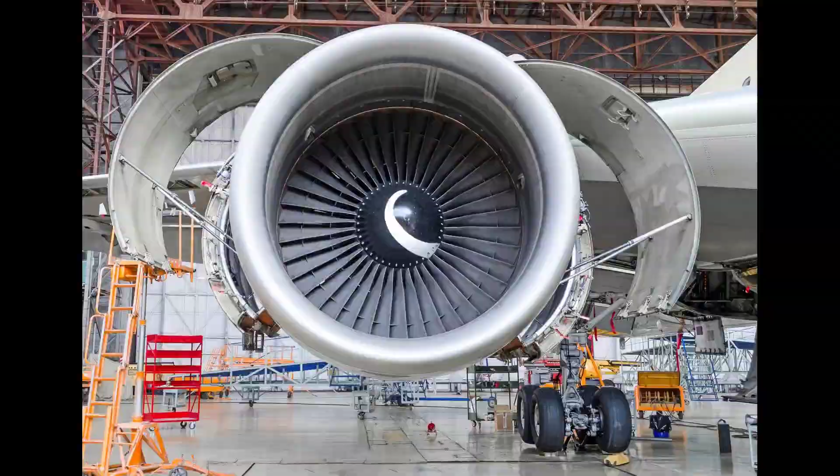Impact Report: anticipated 35% revenue surge in aerospace, telecommunications and environmental monitoring by Q1 2025. Date: February 7, 2025. Executive Summary.

By Q1 2025, the aerospace, telecommunications and environmental monitoring sectors are projected to experience a remarkable 35% revenue surge. This growth is driven by several factors, including technological advancements, an increase in air travel demand, and heightened defense expenditures. This report provides a comprehensive analysis of the competitive landscape and forecasts trends shaping these industries, incorporating insights from various sources.

1. Aerospace sector growth. The aerospace industry is on a robust growth trajectory, with the aerostructures market expected to rise from $60.06 billion in 2024 to $65.07 billion in 2025, representing a compound annual growth rate (CAGR) of 8.3%. Key contributors to this growth include increased aircraft production.

A significant rise in the production of commercial aircraft is anticipated. For instance, Airbus reported a delivery of 735 commercial aircraft in 2023, marking an 11% increase from 2022.

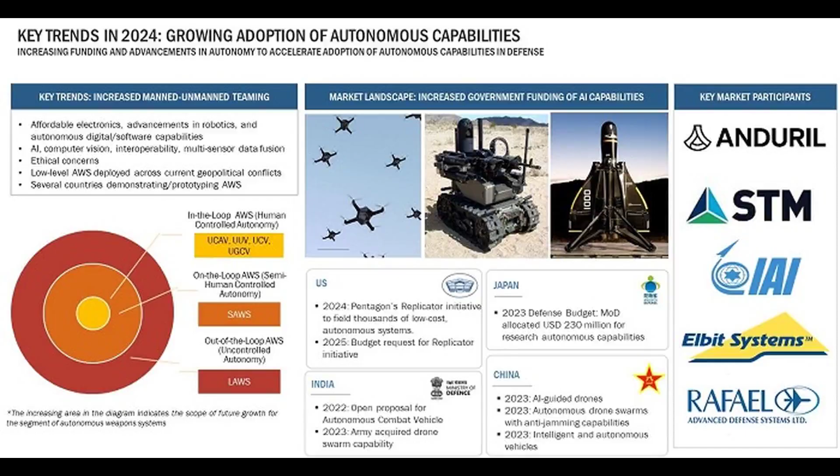2. Telecommunications sector dynamics. The telecommunications sector is poised for growth, primarily driven by the recovery of air travel post-COVID-19. The International Air Transport Association (IATA) predicts an 11.6% increase in air travel demand in 2024, which is likely to catalyze investments in telecommunications infrastructure.

This growth will be characterized by technological advancements. The integration of AI and unmanned systems will enhance operational efficiency across both commercial and defense sectors. Increased connectivity needs: as air travel rises, so does the need for robust telecommunications networks, particularly in remote areas.

3. Environmental monitoring industry expansion. The environmental monitoring industry is gaining traction, driven by a global emphasis on sustainability. This sector is witnessing adoption of eco-friendly technologies. Digital twins and 3D printing are being utilized to minimize waste and optimize resource usage in aerospace operations.

Regulatory pressures: companies are increasingly facing regulations demanding transparency and environmental impact, leading to investments in monitoring technologies.

4. Common themes across sectors. Several overarching themes emerge from the analysis of these three sectors. Technological integration: advanced technologies, especially AI, are crucial for enhancing customer experiences, optimizing supply chains, and improving service delivery.

Defense spending as a catalyst: the ongoing geopolitical tensions are pushing countries to bolster their defense budgets, significantly impacting the aerospace and telecommunications sectors.

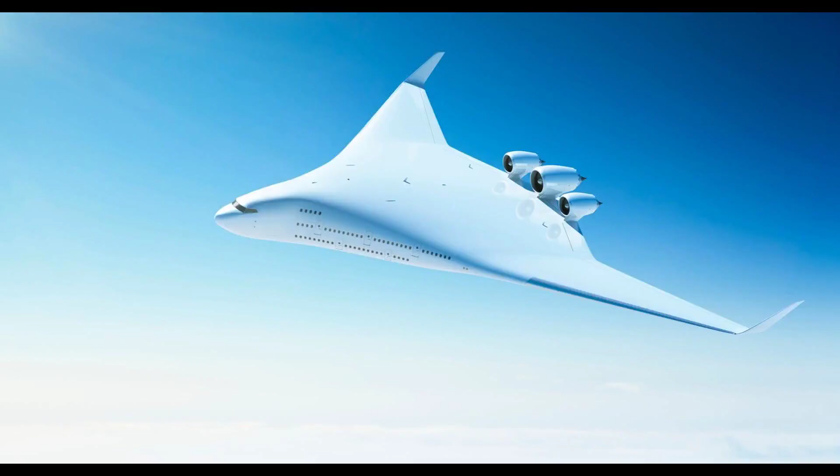Sources: 1. GlobeNewswire - aerostructures market report and competitive analysis 2025 featuring Spirit AeroSystems, Saab, Triumph Group, Leonardo, and Elbit Systems. 2. Deloitte Insights - aerospace and defense industry outlook.

This report encapsulates the anticipated growth trajectories and competitive strategies shaping the aerospace, telecommunications, and environmental monitoring sectors as they approach the end of the first quarter of 2025.

Counterintuitive insights in the anticipated revenue surge in aerospace, telecommunications, and environmental monitoring by Q1 2025: 1. Increased defense spending versus commercial growth.

It may seem intuitive that increased defense spending would lead to a decline in commercial sectors due to budget reallocations, however, the opposite is expected. The projected 35% revenue surge is partly attributed to heightened defense budgets, which not only bolster military contracts but also stimulate demand in the commercial aerospace market. This is reflective of a broader ecosystem where defense innovations often trickle down to commercial applications, thereby driving growth in both sectors.

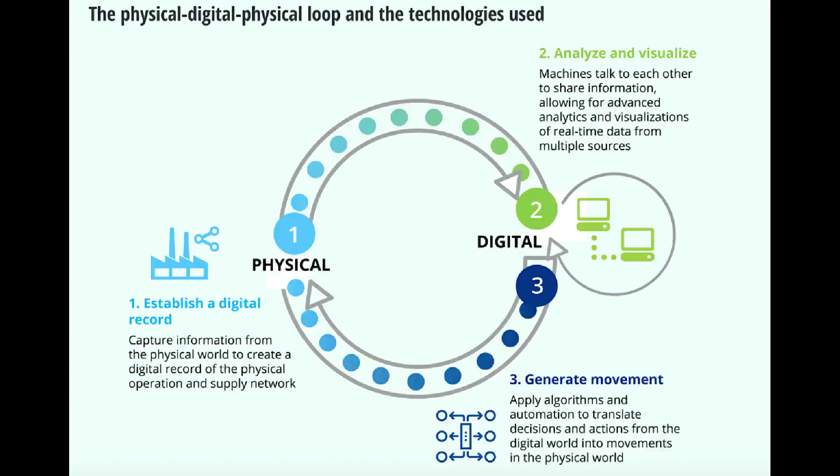6. Advanced air mobility's urban focus. The focus on advanced air mobility (AAM) is often seen as a futuristic endeavor aimed at revolutionizing air travel. However, the current trajectory emphasizes urban applications rather than long-distance travel. This urban-centric approach might seem counterintuitive given the broader context of AAM's technological advancements. The expectation that AAM can become a viable alternative to ground transportation within urban settings highlights a significant shift in market perception and potential revenue streams.

7. Geopolitical tensions as a catalyst for innovation. While geopolitical tensions typically evoke concerns about instability and economic downturns, they are actually acting as a catalyst for innovation within the aerospace and defense sectors. Increased military spending and the urgency to modernize defense capabilities are expected to drive technological advancements and partnerships that may otherwise not have been prioritized. This suggests a counterintuitive relationship where conflict can spur growth and innovation rather than solely being a disruptor.

8. Digital twins and resource optimization. The adoption of technologies like digital twins in manufacturing processes is often associated with high-tech industries, yet their integration into traditional sectors like aerospace reflects a counterintuitive shift in resource management. Companies are leveraging these technologies to optimize existing processes, reduce waste, and enhance operational efficiency. The expectation that such advanced technologies will be foundational in traditional manufacturing challenges the perception that innovation is limited to new product development.

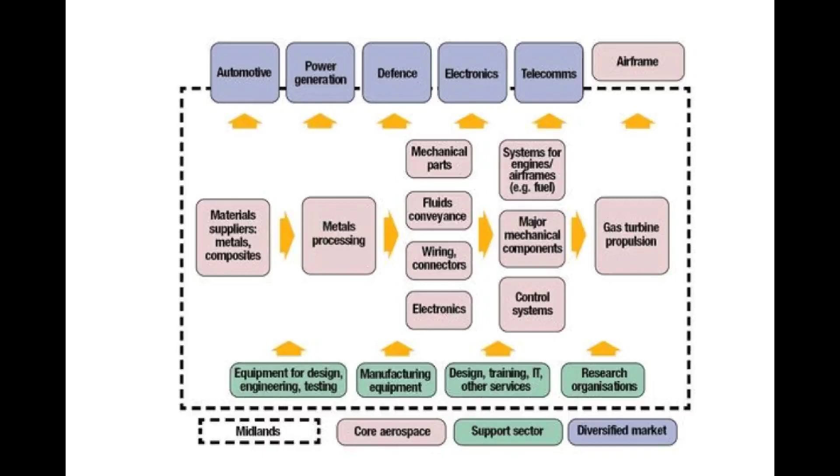10. Coalition building for supply chain integrity. The establishment of coalitions aimed at enhancing supply chain integrity, such as the Aviation Supply Chain Integrity Coalition, might seem like an unnecessary bureaucratic layer. However, this counterintuitive strategy is proving essential in an environment where the risk of counterfeit parts poses significant threats to safety and reliability. By collaborating, companies are not just ensuring compliance but also fostering a culture of quality that is critical to maintaining customer trust and operational effectiveness.

Conclusion: the anticipated 35% revenue surge in the aerospace, telecommunications, and environmental monitoring sectors by Q1 2025 presents several counterintuitive insights. These insights challenge conventional wisdom about the relationships between defense spending, technological advancements, sustainability practices, workforce challenges, and supply chain dynamics.

Understanding these nuances is essential for stakeholders aiming to navigate the complexities of these evolving industries effectively. The report anticipates a significant 35% revenue surge across the aerospace, telecommunications, and environmental monitoring sectors by Q1 2025, unlocking numerous opportunities and challenges for global players.

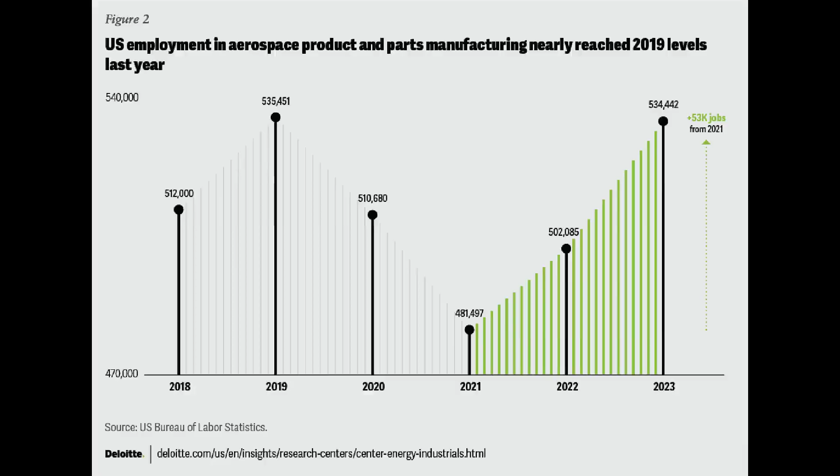While the report captures many compelling trends and projections, certain critical insights may not receive the attention they deserve. Here, we identify these often overlooked elements and explain their significance.

1. Technological integration across sectors. The report emphasizes technological integration, particularly the adoption of AI and digital technologies within the aerospace sector. While many may focus on the broad applications of AI, the specifics of predictive maintenance and operational efficiencies represent a profound shift in how aerospace companies manage their assets. The significance lies in the potential cost savings and enhanced safety that these technologies can bring.

Predictive maintenance can lead to reduced aircraft downtime, thereby increasing fleet availability and driving revenue. Companies like Airbus and Boeing are already pivoting towards these innovations, indicating a competitive arms race that could redefine industry standards.

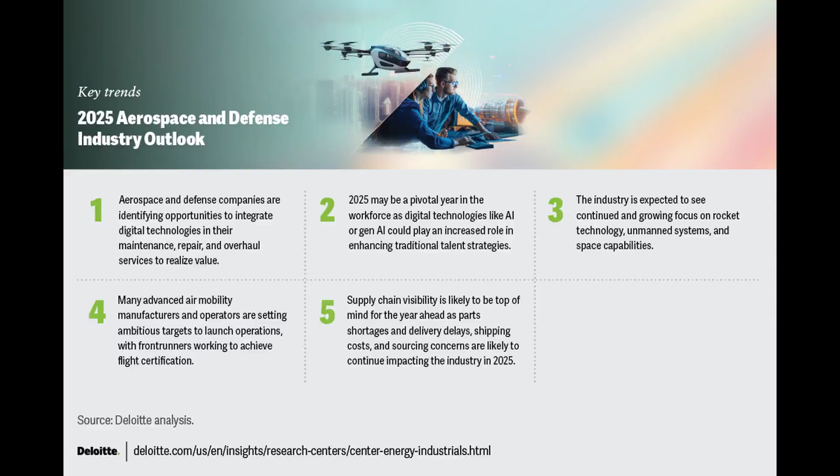2. Defense spending trends. Increased defense budgets, particularly the U.S. Department of Defense's proposed $849.8 billion budget for fiscal 2025, highlight an urgent response to geopolitical tensions. This spending is critical as it shapes the future of aerospace and defense investments.

The implications are twofold. First, it means companies must adapt quickly to new requirements and technologies to secure contracts, and second, it indicates a long-term shift in resources toward defense capabilities that could spur a new wave of innovation. The intertwining of commercial and defense sectors, especially in unmanned systems, stresses the importance of agility in responding to national security needs.

3. Supply chain resilience and visibility. The emphasis on supply chain resilience may seem like a standard industry concern, but the report's insights into new coalitions like the Aviation Supply Chain Integrity Coalition are significant. These coalitions aim to mitigate risks associated with counterfeit parts and ensure quality in sourcing. In an era where supply chain disruptions have become the norm, the establishment of such coalitions could be pivotal in maintaining operational integrity and customer trust.

Moreover, the move towards enhanced visibility in supply chains through digital technologies can enable companies to preemptively address bottlenecks, ultimately supporting growth trajectories. 4. Advanced Air Mobility (AAM).

While AAM is gaining traction, the report hints at critical challenges that may not be widely discussed, such as achieving scale in production while maintaining aerospace-level quality. The intersection of environmental sustainability and urban mobility solutions represents a frontier that could redefine air travel. However, AAM companies need to manage public acceptance and regulatory hurdles to transition from concept to reality.

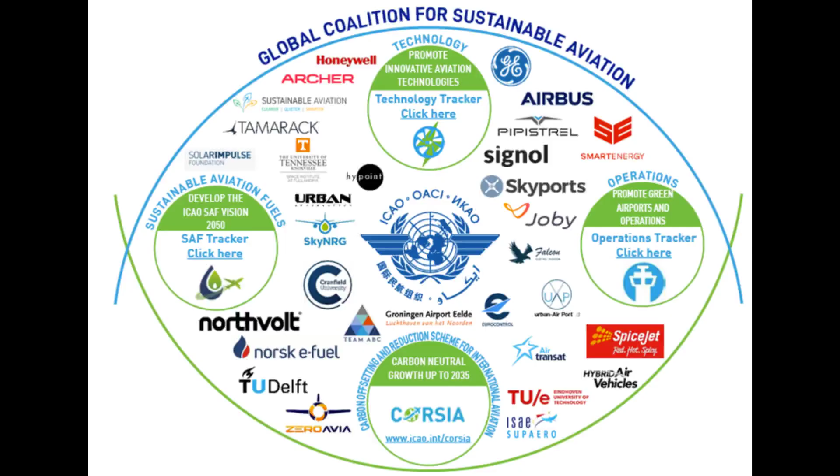The potential for AAM to offer a solution to urban congestion and pollution is significant. But realizing this potential requires not just technological advancements but also strategic partnerships and community engagement.

5. Environmental monitoring and sustainability. The environmental monitoring segment is often overshadowed by its aerospace and telecommunications counterparts. However, the increased focus on sustainability highlights a broader industry trend toward eco-friendly practices. Companies adopting advanced technologies like digital twins and 3D printing are not merely optimizing processes but are also addressing consumer and regulatory demands for sustainability.

As environmental concerns become central to public discourse, companies that lead in this domain could enhance their reputational capital, potentially driving consumer preference and regulatory support.

6. Workforce challenges and talent acquisition. The challenges in attracting and retaining talent in the aerospace sector, as indicated by the anticipated need for an additional 123,000 technicians in the U.S., are critical yet often overlooked. The industry's success hinges on its ability to cultivate a skilled workforce capable of leveraging emerging technologies.

Companies that innovate in workforce strategies through apprenticeships and partnerships with educational institutions will likely position themselves favorably in the competitive landscape. The aging workforce poses risks of knowledge loss. Therefore, strategies for knowledge transfer and mentorship will be essential for continuity and growth.

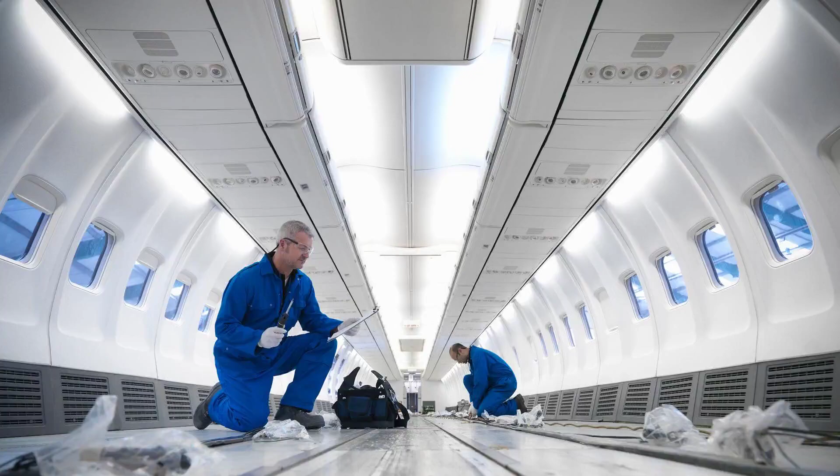Companies that can identify and forge effective collaborations may not only enhance their market position but may also drive industry standards and practices. 8. Regulatory and geopolitical factors.

The potential impact of regulatory changes and geopolitical dynamics on the aerospace sector is another critical area that warrants attention. As nations prioritize defense and aerospace capabilities, regulatory environments may shift, affecting how companies operate and innovate. For instance, changes in export controls or defense procurement policies could reshape competitive dynamics in the industry. Companies must remain vigilant to these changes and engage in proactive strategies to align with evolving regulatory landscapes.

In conclusion, while the anticipated 35% revenue surge in aerospace, telecommunications, and environmental monitoring sectors is indeed noteworthy, it is the underlying trends and shifts within these industries that hold the most significant implications for stakeholders. Understanding these nuances, ranging from technological advancements and supply chain strategies to workforce challenges and regulatory factors, will be crucial for companies looking to navigate the complexities of a rapidly evolving landscape.

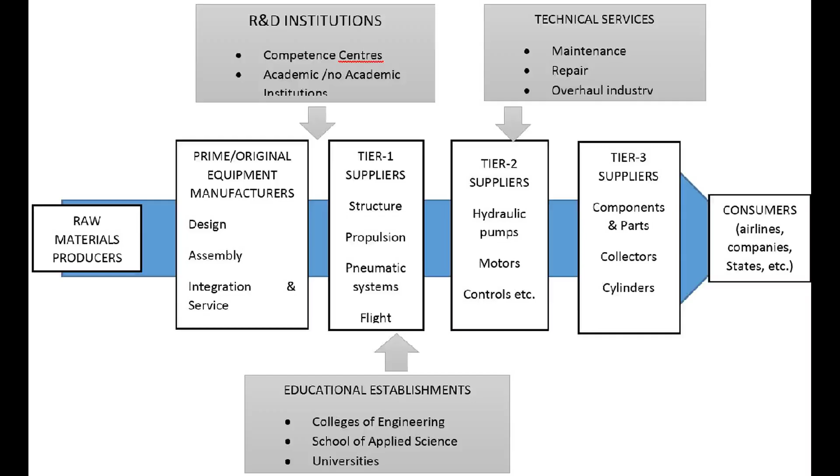The anticipated 35% revenue surge in aerospace, telecommunications, and environmental monitoring sectors is heavily driven by the integration of advanced technologies such as artificial intelligence, AI, digital twins, and unmanned systems. These technologies are set to optimize operational efficiencies, improve customer experiences, and enhance supply chain management. For instance, in aerospace, AI is revolutionizing maintenance, repair, and overhaul (MRO) practices through predictive maintenance, thus minimizing downtime and increasing aircraft availability. The synergistic effect of these technologies across sectors not only enhances productivity but also fosters innovation, making it a crucial point for discussion.

2. Impact of defense spending and geopolitical tensions. The increase in defense budgets globally, particularly the U.S. Department of Defense's proposed budget of $849.8 billion for fiscal 2025, is significantly shaping the landscape of the aerospace and defense industries. This surge is largely a response to escalating geopolitical tensions and is driving investments in unmanned aerial systems and advancements in missile technologies. The defense sector's focus on modernization and capability enhancement is expected to result in a robust demand for aerospace products and services. Analyzing this dynamic will provide insights into how defense priorities are reshaping industry growth strategies.

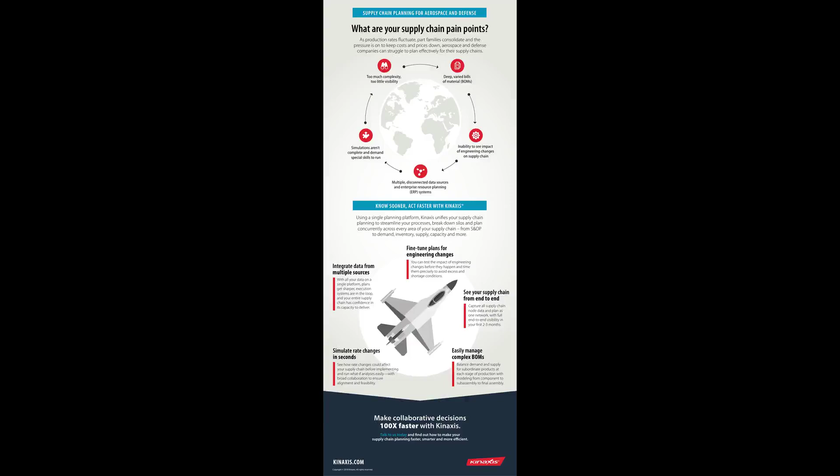3. Supply chain resilience and visibility. The aerospace and defense sectors are grappling with ongoing supply chain challenges, including parts shortages and delivery delays. The establishment of coalitions such as the Aviation Supply Chain Integrity Coalition exemplifies the industry's commitment to ensuring quality and reliability in sourcing materials. Companies are increasingly focusing on enhancing supply chain visibility to mitigate risks associated with global trade dynamics and geopolitical uncertainties. Discussing the strategies employed by leading firms to improve supply chain resilience will shed light on the industry's adaptive measures and future outlook.

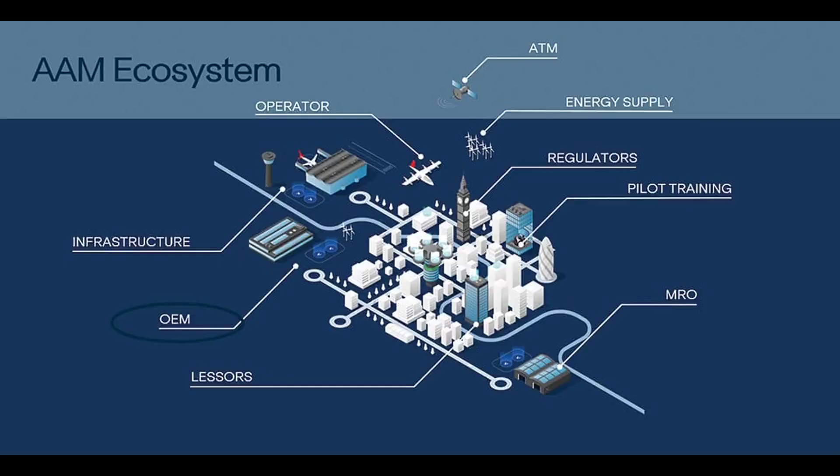4. Advanced air mobility (AAM) as a growth frontier. The advanced air mobility sector, particularly focused on electric vertical takeoff and landing (eVTOL) aircraft, is emerging as a significant growth area. The industry's potential for environmental sustainability and urban transportation solutions positions AAM as a transformative force within aerospace, with substantial investments and pilot projects underway. The successful scaling of AAM operations hinges on achieving cost-competitive pricing and community acceptance. Exploring the challenges and opportunities presented by AAM will reveal its implications for the future of urban mobility and the aerospace industry as a whole.

These four points collectively encapsulate the anticipated shifts within the aerospace, telecommunications, and environmental monitoring sectors by Q1 2025, highlighting the interplay of technology, defense dynamics, supply chain strategies, and emerging markets.

1. The Boeing 737 MAX crisis, 2018 to 2020. The Boeing 737 MAX crisis serves as a significant case study in the aerospace industry regarding the impact of technological advancements and regulatory scrutiny. Following two fatal crashes involving the aircraft, regulatory bodies worldwide grounded the fleet, leading to a substantial decline in Boeing's revenue and market share. The crisis highlighted the importance of safety and regulatory compliance and resulted in billions of dollars in losses for Boeing, as well as extensive investigations into the company's practices. The long-term effects included increased scrutiny on aircraft design, manufacturing processes, and maintenance practices, underscoring the critical need for robust quality assurance and risk management in the aerospace sector.

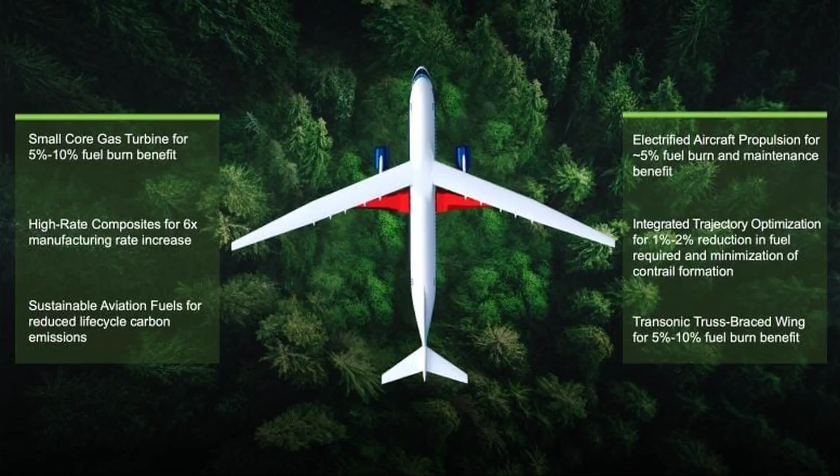Future outlook: predictions for aerospace, telecommunications, and environmental monitoring by Q1 2025. As we approach Q1 2025, industries including aerospace, telecommunications, and environmental monitoring are poised for significant transformations, with revenue surges anticipated at around 35%. This growth is rooted in technological advancements, increased air travel, and a heightened focus on sustainability. Below, we explore the expected trends and developments across these sectors.

1. Aerospace sector growth. The aerospace industry is expected to experience robust growth driven by several factors. Increased production of commercial aircraft. With the recovery of air travel post-COVID-19, commercial aircraft production is projected to rise substantially. For instance, Airbus reported a delivery increase of 11% in 2023, highlighting the sector's resurgence.

The aerostructures market is forecasted to grow from $60.06 billion in 2024 to $65.07 billion in 2025, reflecting a CAGR of 8.3%. This demand is fueled by modernization programs and an aging fleet requiring upgrades.

Defense spending. Geopolitical tensions continue to drive defense budgets upward. The U.S. Department of Defense has requested a budget of $849.8 billion for fiscal 2025, which will significantly impact investments in aerospace and defense technologies. This spending is likely to bolster the development of advanced materials and technologies, including unmanned systems and hypersonic capabilities.

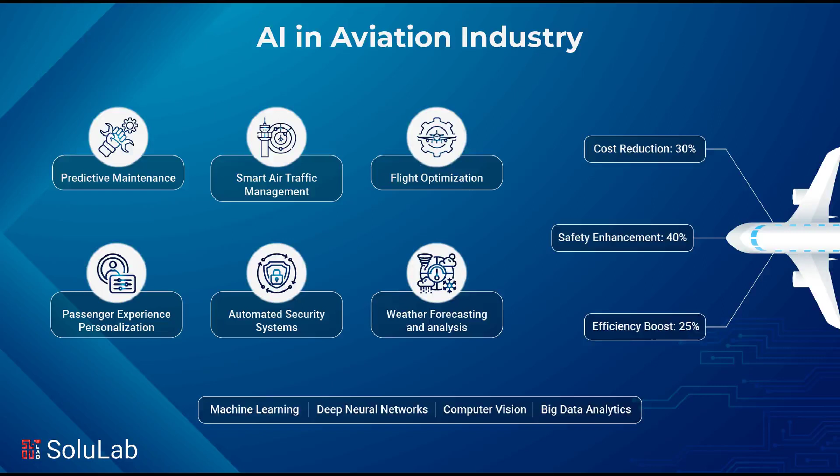Workforce development. The aerospace and telecommunications industries will face talent shortages, necessitating strategic initiatives to attract and retain skilled workers. Companies will leverage digital technologies to improve training and operational planning, ensuring a capable workforce to meet future demands.

Strategic partnerships. Collaboration among industry players will become increasingly important as companies seek to leverage each other's strengths for mutual benefit. Strategic partnerships will facilitate innovation, reduce costs, and enhance competitiveness.

Conclusion. As we head into Q1 2025, aerospace, telecommunications, and environmental monitoring sectors are on the brink of significant growth driven by technological advancements, increased defense spending, and a strong focus on sustainability. The integration of AI advances in manufacturing and strategic investments will shape the competitive landscape, paving the way for a dynamic future. Companies that effectively leverage these trends will likely emerge as leaders in their respective fields, capitalizing on the opportunities presented by this evolving market landscape.